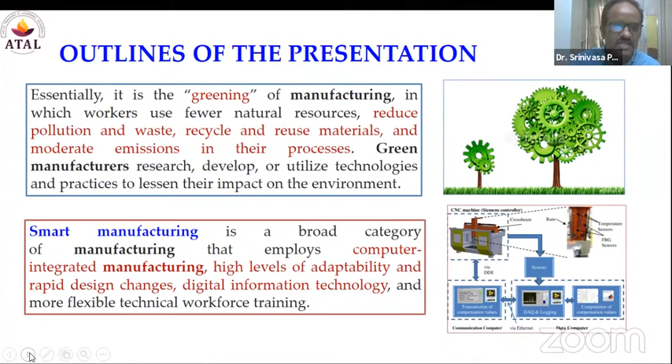So my presentation is going to consist of the details of the work.

As part of my title, it is all about developing a controller which works in an adaptive way according to the situation. For this particular problem, I need to define the problem based on my literature survey. I'm not going to present the literature due to shortage of time.

Based on the literature, I have identified some gaps. Those gaps will be the targets of my presentation, represented as objectives. To achieve these objectives, I need to select an experimental setup.

Then I need to design an experiment for how to utilize the setup in an optimum way - what are the minimum number of trials so that the required output can be achieved. For that purpose, I need to go for design of experiments.

Then I need to give details about the major equipment which is procured under the funding of Government of India. I have used this equipment as part of my DST project, a DST funded project.

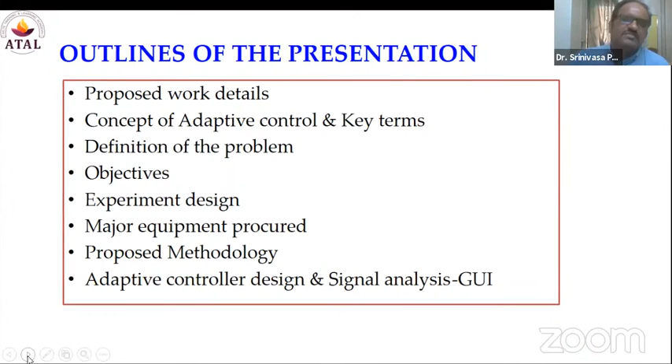First of all, tool material, cutting parameters like cutting speed, which will be expressed in meters per minute. If you want to express in terms of RPM, definitely you can do, but you need to consider the diameter of the cutter and the feed rate, depth of cut, workpiece material, cutting operation type, coolant, tool holders, machine stability.

Every machine inherently, by default, the OEM manufacturer is going to specify about its limits. Whenever you are pushing that particular stability limit, the machine will start giving unwanted expressions. It is started giving its responses.

Now you need to capture the responses and understand them. Even though you are able to visualize or hear the particular responses, this visibility or audibility does not give you any quantified information. To get it quantified, you need to take the help from the sensors.

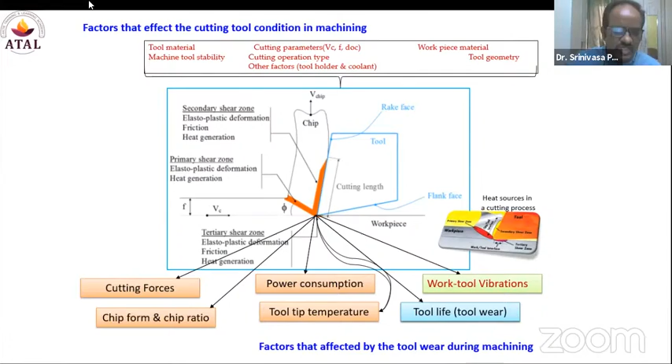And if you talk about any academic institution, the maximum rotational speed we allow our students to inspect or carry out their experiments is generally up to 2000 RPM. In rare cases we allow undergraduate or PG students to go up to 3000 RPM or less than 4000 RPM. So as part of this presentation, I am going to give a scope on working beyond 10,000 RPM. The machine we have procured as part of the DST funding is capable of working up to 18,000 RPM.

Now, so my concept is an adaptive controller design that is going to work based on the amount of vibrations present during the machining operation. So whatever logic I'm going to suggest, whatever decision I'm going to take out of this work, is based on the vibration signals only. That is why I'm spending a minute or two giving brief details about vibrations. I'm not going into complete detail, it is almost impossible to convey. Even I have not gone beyond a certain level of this particular concept.

It is an ocean. If we talk about vibration, it is present everywhere. And I'm trying to use the concept of vibration, and I have incorporated this information into decision making. Now, vibration is a movement of a body about its reference position due to an excitation force that causes the motion. That is what we have discussed.

When there is no interaction, there will not be any vibration. When there is an interaction, automatically it will start to vibrate and deviate from its required position. That is called the deflection.

So about the first signal, this is about the basics of vibration and particularly machining vibrations. These two points must be kept in mind if you are planning your research in the field of machining with the help of vibrations.

Coming to the adaptive control. So far, I have presented the basics, the fundamentals, the key points associated with my field of application. You can consider this as a basis for this particular approach, that is adaptive controller design.

Now, as we mentioned earlier, every machining process will have speed, feed, depth of cut as basic input parameters. If you want to consider cutting tool material property as one of the parameters, you can. If you want to consider the hardness of the workpiece material, you can also include that in designing the experiment. Along with speed, feed, depth of cut, workpiece hardness, cutting tool Young's modulus, whatever parameter you wish to include, you can include.

Based on that, you can design the experiment. By involving a minimum of 3 parameters or many parameters as input, irrespective of the amount of input parameters, the output process variables are common: forces in cutting, torque, cutting temperature, horsepower, and spindle deflections or vibration during machining.

Now, these things must be given focus. If they're understood properly, if the information collected in the form of output process variables is used in the right way, there is a lot of scope for safeguarding machinery and improving the productivity of the process. There is a possibility of reducing the cost, and if you are able to reduce the cost of the whole process, it automatically increases the profits to the organization.

So when a variation is occurring, adaptive control is ready with a solution. How it is going to give the solution will be understood later.

Now coming to the definition of the problem. The main objective is to design and develop an adaptive controller design.

We have considered vibrations as a parameter for judging this, because even today, less attention is paid in machining with respect to vibrations. Vibration is a huge area with many applications in industry, but very little focus is paid with respect to vibrations in machining. That is why I have selected vibrations as a decision-making tool as part of this investigation.

I'm not the first person, but I'm one of the few who have considered vibrations as a decision-making tool to do some application with respect to vibration in the field of machining. So that is the main intention.

Now, with the help of vibrations, we would like to show the relation between the vibrations and the surface roughness.

For this process, we need to collect a lot of vibration data. Then we need to quantify the vibration data. Then you need to select which parameter is suitable for your mathematical modeling.

That is why I've specifically mentioned the units: displacement in microns, and the other two are mm per second and mm per second squared, velocity and acceleration. If you know one particular value, one is derivative, the other is integration, and you will get the other two values.

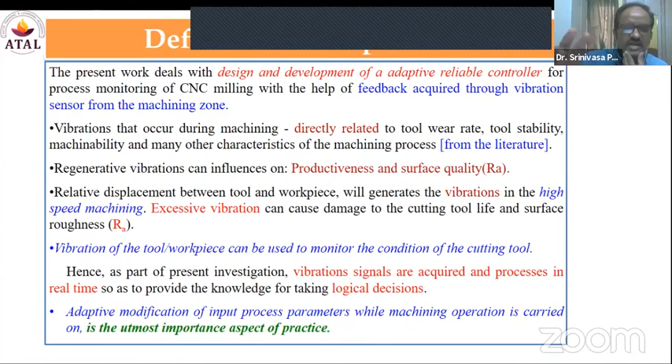Here the main important task is to collect the information about the vibration, then quantify the vibration signal, then develop the relationship between surface roughness and vibrations, then relate these two parameters, roughness values and vibration values, in defining the flank wear. If the flank wear is less than 0.3 mm, you can continue the machining, because it is high-speed machining.

High-speed machining is going to generate highly smooth surfaces. I can give the cutoff value of the cutting tool flank wear up to 0.6 mm. But if I give 0.6 mm, I need to increase the acceptable range for the vibrations also.

As it is high-speed machining and the quality of machining is very important, focused on the surface roughness parameter, I need to give close acceptable limits with respect to surface roughness and vibrations. So I have considered the surface roughness and flank wear as the judging parameters, one with respect to workpiece, one with respect to cutting tool. These two parameters are used to assess the quality of the surface and the quality of the cutting tool, and they must be defined along with the vibration parameters. If that is done effectively, then I can claim this adaptive control is going to act based on the vibration signals, because the vibration signals act as input parameters for defining surface roughness and flank wear.

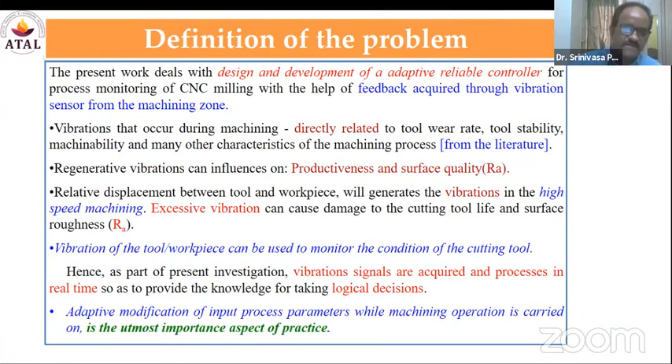Now coming to high-speed machining and design of experiments, the initial cutting speed considered in meters per minute is converted into RPM. We converted it to 7,000 RPM, 12,000 RPM, and 16,000 RPM. Whenever you talk about high-speed machining, if it is beyond 4,000 RPM, you can consider it high-speed machining. For example's sake I'm saying this, but there are some constraints for identifying the cutting speed with respect to workpiece hardness that also define whether it is high-speed machining or not. But for this application, anything beyond 4,000 RPM comes under high-speed machining. So the experiments were conducted at 7,000 RPM, 12,000 RPM, and 16,000 RPM — definitely, whether you consider these conditions or not, it is 100% high-speed machining.

The feed rate is expressed in mm per minute, with different types of depth of cuts and different workpiece materials used. There are variations with respect to the cutting tool diameter and the cutting tool material. We used the most popular technique, the L9 orthogonal array. This particular work and figure is collected from this publication.

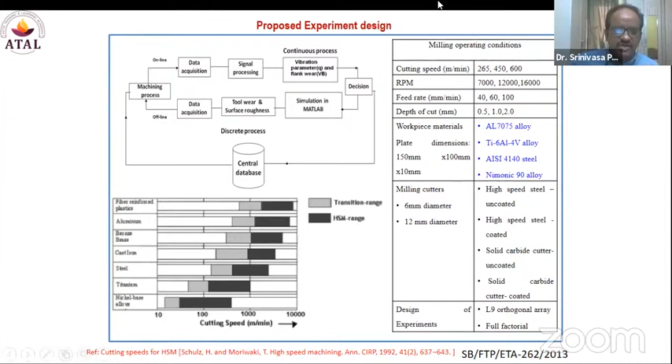As I told, it acts according to the situation because it is an adaptive controller system, it requires some database. Out of the experiment, you identify different situations. Each and every situation must be recorded electronically so that decisions are made based on interacting with the central database. We were able to establish communication between the database, the part programming console, and the sensor by using MATLAB.

First, the objectives of this work: we need to collect the data in real time. The immediate task, once collection is over, is to quantify the signal. We are focusing on the vibration signal, quantify it, then identify the constraints for each and every parameter. Then this experiment must be designed according to the design of experiments, DOE — you can use Minitab software for designing the experiments. Then we identified and quantified the vibration parameter, and tried to relate this quantified vibration parameter with the judging parameter of the cutting tool, that is tool wear.

Now, once decisions are ready and the logic is ready, we try to develop a strategy. This is the ISO 10816 standard, exclusive for machining operations with respect to vibrations. Whenever the horsepower of the machine is of a certain range, for example 10 HP, if any machine runs with 10 HP or less, this standard can be used for comparison or evaluation. They have given 5 different sectors of different ranges of speed and different ranges of horsepower of the machine.

If you type this particular keyword in Google, you will get an idea about how they have classified and suggested standards based on power, horsepower, and rotational speed. We have considered this particular standard for decision making. We collected the data and were able to take some decisions, but that must be approved by an international organization or approved scientific community. ISO is approved by most people and has approval throughout the world. So whatever decisions we made are in accordance with ISO 10816.

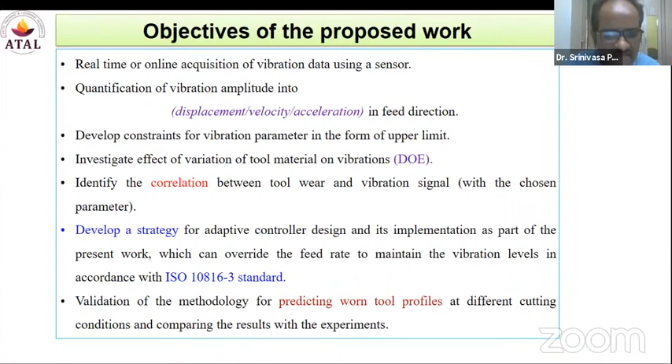This is the equipment I have procured as part of my DST project. This facility is available at GITAM main campus, central research facility, and this is a 3-axis CNC machine. The sensor we used is an accelerometer, Kistler model, a highly sensitive piezoelectric based accelerometer, 8793. It is mounted here at the spindle head, and it is capable of working up to 18,000 RPM.

This is where we are trying to operate the machine. Communication is established between the sensor and the control panel through an RS-232 port. Whoever works in a CNC machine can understand the meaning and need of this particular port. Without the RS-232 port, you cannot transfer information in the form of a part program to the CNC machine. This port is a must for the CNC machine.

A line of instruction, like N01, indicates part of a program. A set of instructions is the program. These programs must be compiled at the controller, and then the instructions are converted into digital form. This information is transferred to the servo motors, which are attached to each and every axis. Each and every servo motor has a lead screw.

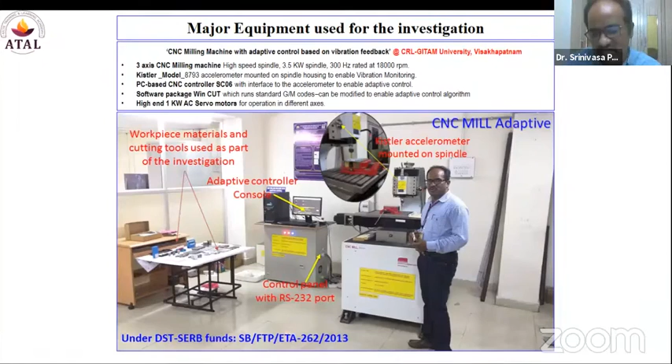We are allowing the machine to run as per our requirement. During the operation, we are focusing on the vibration. We are able to collect the information about the vibration, and then we were able to distinguish the vibration parameter out of the signal.

If you are able to identify this particular acceleration at this particular frequency, and the value of the acceleration is acceptable by ISO 10816, there is no problem. You can continue the program, you can continue the machining. There is no need to change the input parameters.

Whenever this particular conversion of the signal identifies a value which is not acceptable according to the suggestions of ISO 10816, then this system needs some change of input instructions.

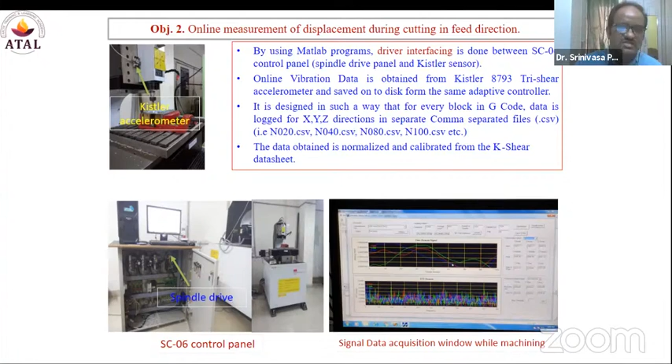Now, this is about algorithm. So, at what time? Rashagir, am I going out of time? It's good, sir, going on. I have no problem, but if participants are interested, I can take 10 to 15 more minutes. Please go on, sir.

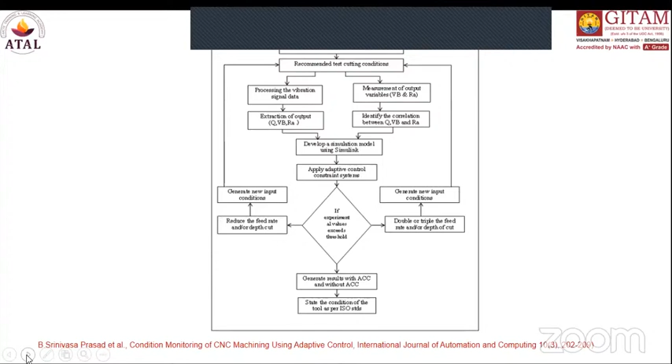Please. So for every methodology, for every concept, you need to develop your own method. Then only, if this particular process or algorithm is implemented by any researcher attempting to repeat your task, it should yield consistent results. That is why you get acceptance by premier journals. This is accepted by the International Journal of Automation and Computing. They validated this algorithm, and we were forced to share our MATLAB program also. Only then did they accept it.

So if anybody is ready to execute the same thing, if you want to repeat any good work from any research paper, we will end up generating a new set of data. That is also considered research. There's no problem with it, because the instrument used by me is different from the instruments available at your end. You are trying to repeat a process or algorithm with your instrument. Based on your instrument's least count or whatever parameters you consider, whether your instruments can be standardized or not, this factor can also influence results. So the set of instruments is different, the situation is different, the machine is different, cutting tools or whatever - there is a definite change in repeating the same task.

If you're able to generate data that is not similar to the data I have generated, and convert your data into a schematic representation that gives understanding or interpretation of your results, and you're able to add your interpretation around the graphs you've generated, you may end up publishing a paper. That is how I've published a few of my publications.

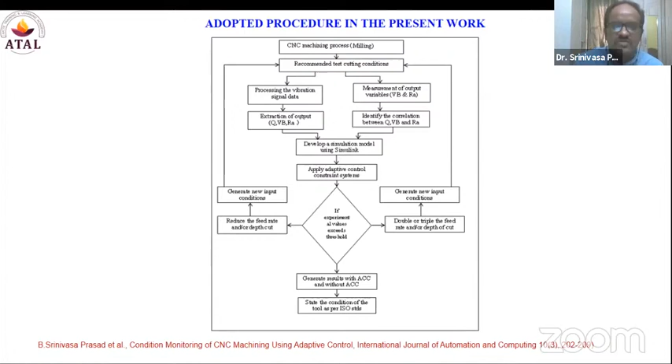Now coming to the real application - as I mentioned, adaptive control is going to act according to the source variables. It has some set of solutions. When a specific situation comes into the picture, it opens that particular solution. If there is an air gap present, you implement program number 1 and execute it. When there is no air gap, you select program number 2. Now I'll give you one more example.

All of you, please observe the middle figure - no air gap. When there is no air gap, you need to continue machining with the required feed rate because you need to remove the material. There is a requirement to remove the material. You should not change the feed rate. If you change the feed rate, it automatically stops removing material from the start.

Now, when there is an air gap, there is no need to maintain the same feed rate. From this location - for example, if the air gap starts here and ends here - there's no need to move with the predefined feed rate. You can move from the starting location to the ending location of the air gap a bit faster than the required, pre-programmed rate. There's no need to maintain the same feed rate.

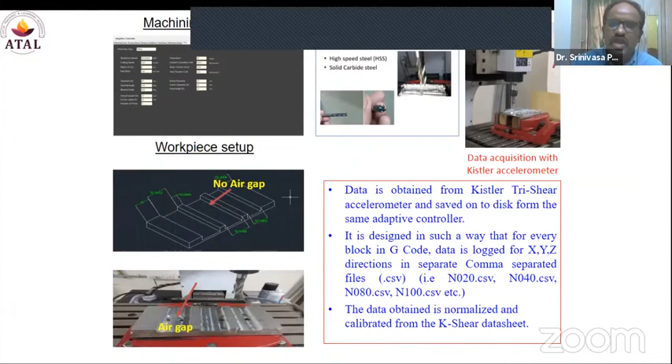If the vibration levels indicate no air gap condition, there is another set of solutions. If vibration signals are present, you can continue machining because the vibration levels identified are well within the limits of the ISO 10816 standard. As long as the vibration signals are within the guidelines of the ISO standard, there is no problem. You can continue the same input parameters for executing the machining tasks, cut 1, 2, 3, or 4, whatever it may be.

So based on excessive or lesser values, there are 2 different solutions. With the presence of the air gap versus without presence of the air gap, another solution. Amount of forces, another solution. Amount of surface roughness, another solution. So like that, you can increase the complexity of the whole system.

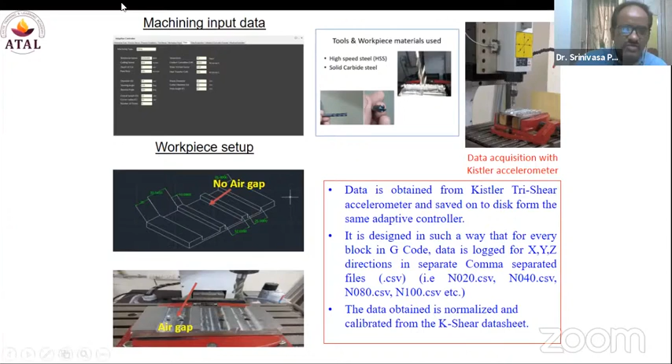How exactly it is going to work will be shown in the next slide. This is about machining type and process setup. Everything can be given as an input, and this is where the vibration signal comes into play.

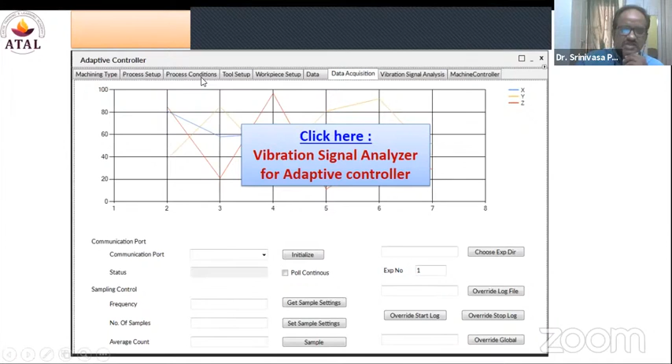So I'm taking the time, don't worry. Now, this is about the initial time signal. You can identify the presence of vibration in the system, and you can quantify how much it is, giving a quantified signal.

Now, I'm going to show this with a MATLAB application.

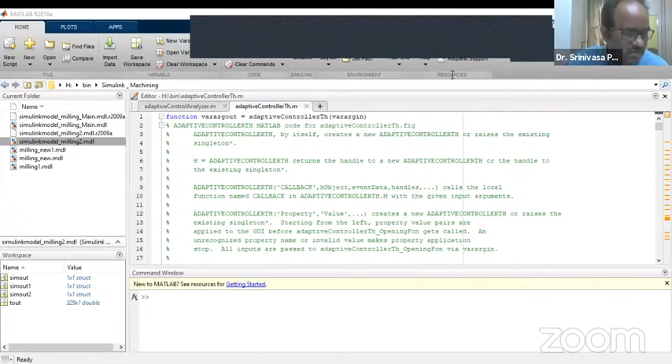So all of you, can you see my screen? Yes sir, yes sir, it is visible sir. Okay.

So it takes some time to process. Kindly cooperate with me because it is part of a DST project. If I'm able to generate some idea in any of the participants, it will be useful for me, it gives a lot of happiness to me. That is why I'm taking extra time. I'm not hiding anything, I'm giving all the details. It is an open document, supported by the government of India, and it is my duty to give it back to the interested people.

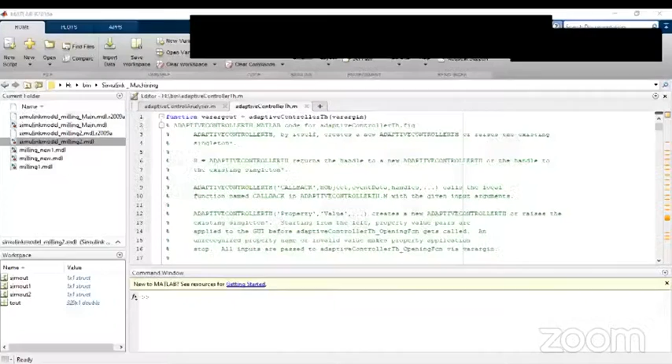So I think it is taking time. Sir, can you help me how to do this? I'm trying to show the MATLAB application. It is not visible, sir. You can share the screen, sir. That is what... yeah, it is visible sir now.

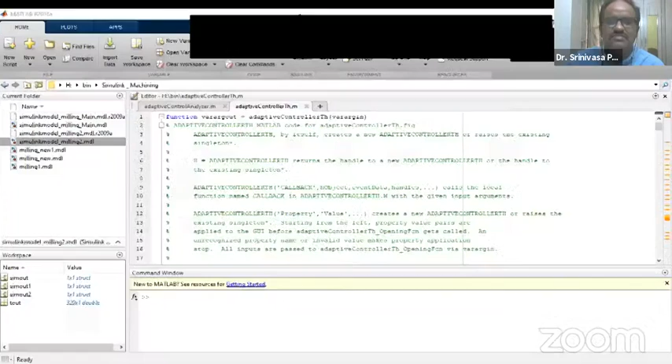Sir, but some black patches are coming, sir. Okay, 1 second, I'm closing down and I'll close it and reopen it again. Okay sir. This is the last attempt, if it doesn't work I'm going to go ahead. Sir, still some problem is coming, sir. Okay, I'll continue with the presentation. Okay.

No problem, there is... I have selected two options. I'll show the exact application out of it.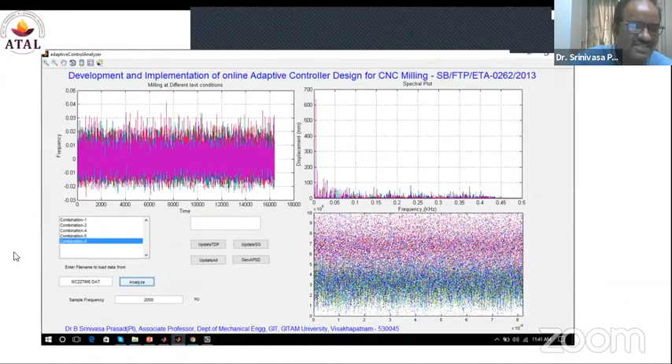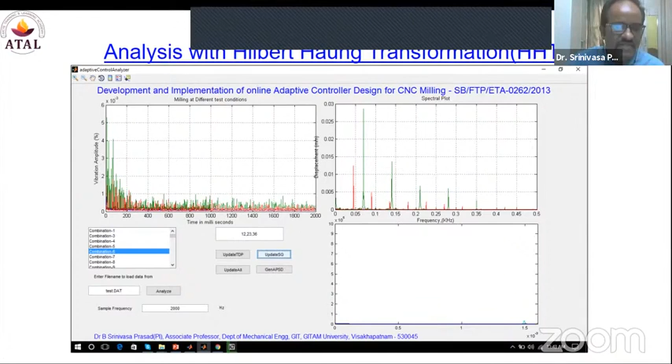This particular window is going to give the amount and quantity of the experimentation we have conducted. Identifying the vibration parameter is one thing, and identifying when to implement the adaptive control logic is another thing.

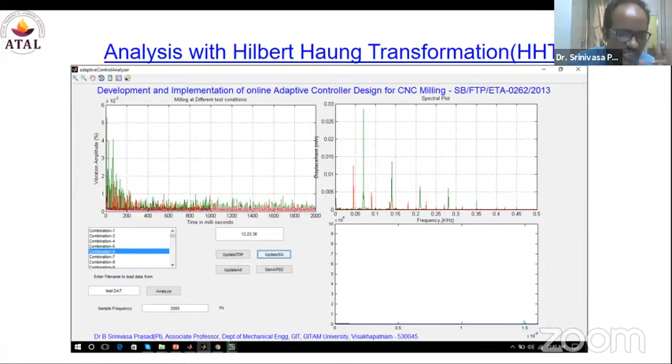Vibration signal quantification is done with the help of fast Fourier transformation, and deciding about implementation of the adaptive control logic is done with the help of Hilbert-Huang transformation. So two different signal transformation functions are used: one is FFT, the other is HHT. These are popular applications, and HHT is nowadays most popularly used extensively for machining applications. One is for quantifying the signal, one is for logic implementation.

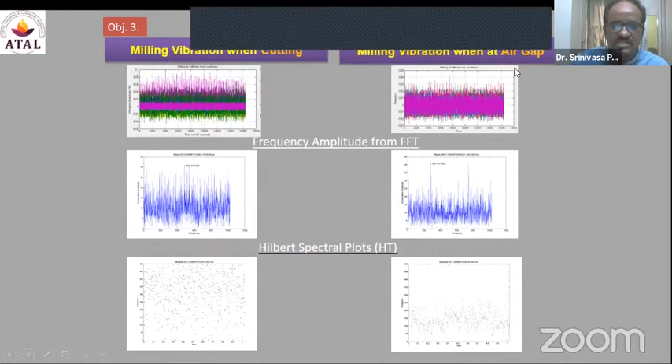So when cutting without milling, vibration during the cutting, milling vibration when there is no material removal.

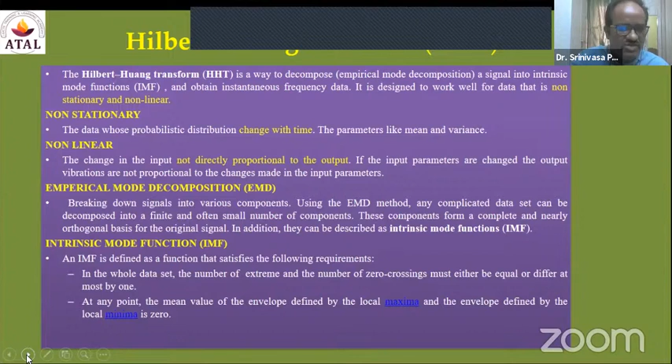Hilbert-Huang transformation is used for nonlinear applications. Most machining applications, especially high-speed machining, generally involve nonlinear data. So this is where the Hilbert transformation is very much useful.

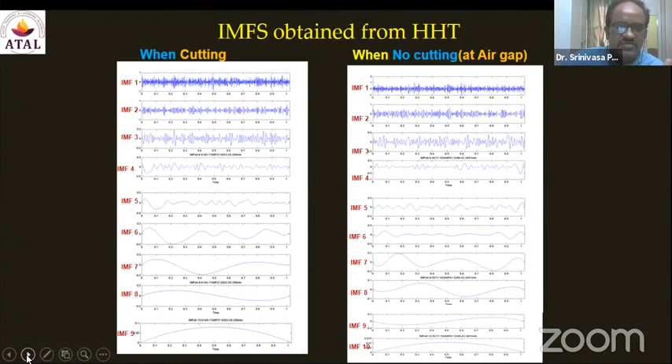I'll show you now. You need to identify which signal. First, initially, out of your collected signal, you need to decompose into more than 10 responses. In most cases, up to 5 responses, there will not be any change. Beyond 5, the system starts showing differences. These deviations must be related to the decision-making for implementation of the adaptive control system.

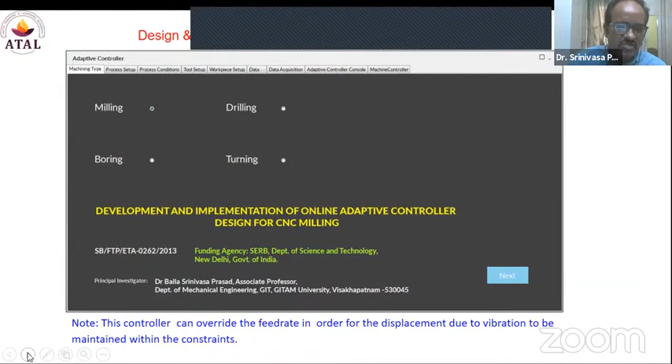Due to shortage of time, I could not focus on this because I need to show some live examples. I'm quickly going to the next step.

This particular system we have developed is capable of taking an AutoCAD drawing as an input parameter, and it automatically generates a part program. Based on the 2D drawing, it generates the part program. That is how we have developed it. Once you're comfortable with some programming, anything can be done.

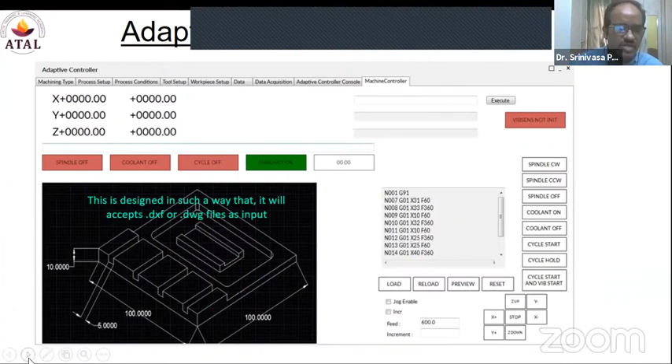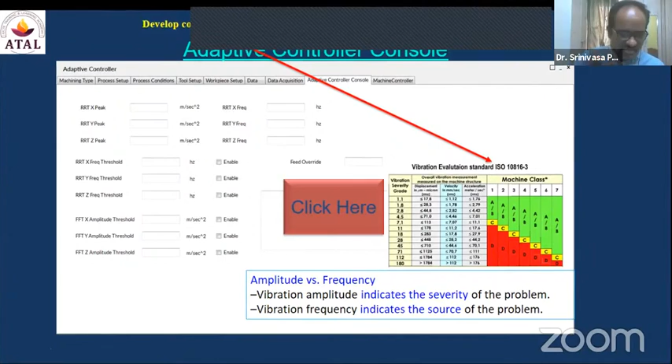I was mentioning the standard ISO 10816, which gives the suggested guidelines for different categories of machines. You can consider A, B, C, D. My machine fits the category guidelines of A, working under 20,000 RPM, with some horsepower constraint. Based on that, I selected the guidelines associated with category A.

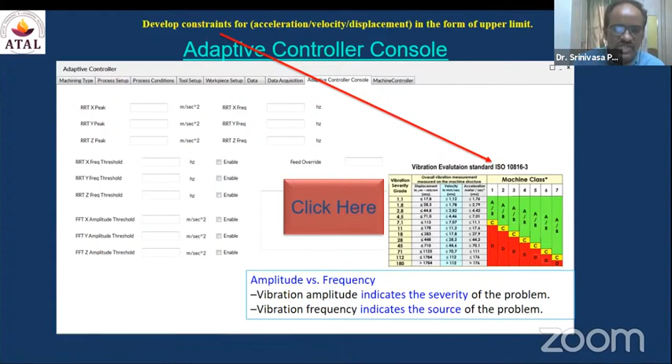Now, if I'm able to project the MATLAB application with the help of this Zoom application, you could have a clear idea about how exactly this MATLAB Simulink is supposed to work. Now you can observe with ACC, with adaptive control, and this is without adaptive control.

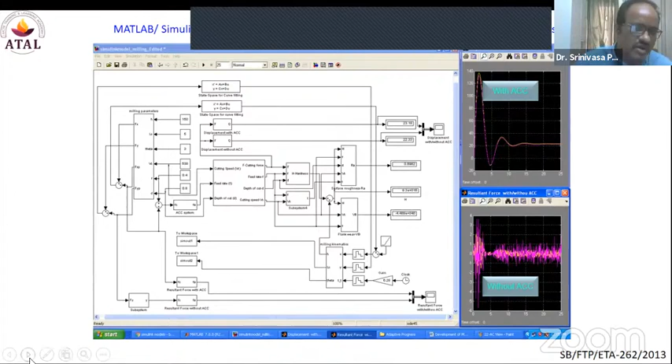This process will take place in less than 20 seconds on the controlling system we have used to operate the CNC machine. That is how we developed the program. Everything, most of the programs, are prepared with MATLAB and 20% from AutoCAD, using AutoLISP, not the 2D drawings, AutoLISP.

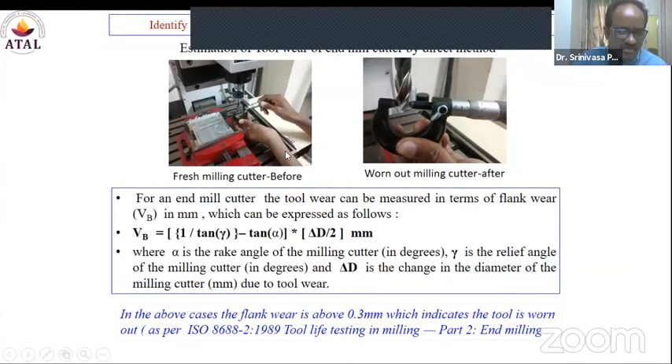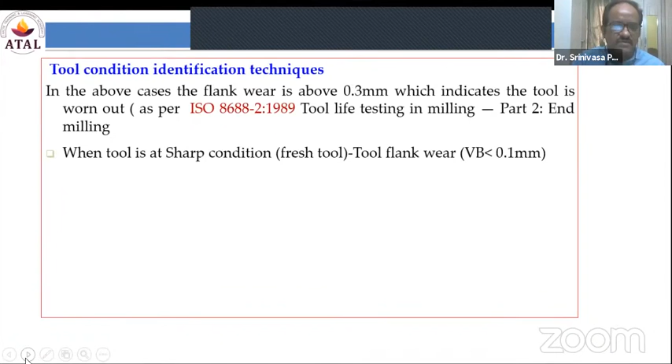This is about measuring the judging parameter, that is tool wear. Now, these are the constraints I have considered. If you remember the vibration severity charts, I have considered this particular standard.

As long as the displacement values, I considered the displacement parameter depending on my mathematical modeling. There is no restriction to only follow displacement. Based on the LHS units matching, I used this particular parameter. As long as the displacement values are less than 20 microns, there is no problem, and you can continue the same input instructions.

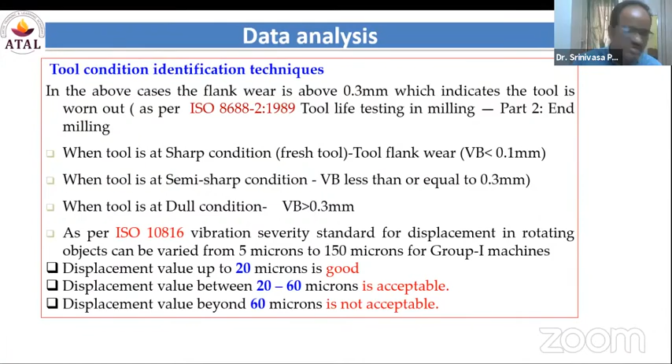The displacement was found to vary between 20 to 60 microns. When the displacement value is beyond 60 microns, machining is not allowed to continue. That is identified with the flank wear values also. As long as flank wear is less than 0.1 mm, that correlates with the 20 micron situation. As long as flank wear is within 0.1 to 0.3, the situation is similar to that vibration level. Whenever the vibration displacement value is found beyond 60 microns, automatically the flank wear is found beyond 0.3 mm.

That is why I considered ISO 10816 and ISO 8688 for judging tool wear with respect to the multi-point cutting tool; for a single point cutting tool, ISO 3685 applies. These values are considered as cutoff values with respect to rejection of the cutting tool, and also as cutoff values with respect to the vibration signal. When there is a deviation outside this group, you need to take a decision.

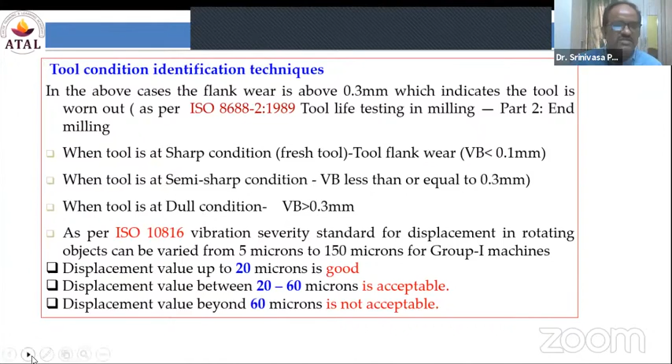So we were able to establish the logic with the help of FFT and HHT, and I'm going to show the execution of this particular thing.

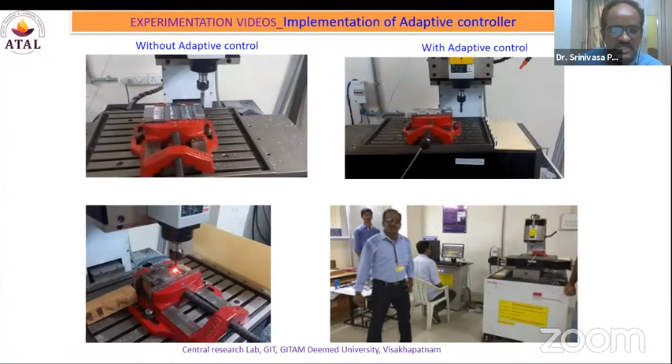Now, the logic is developed only for one situation I have presented, due to shortage of time. But we were able to execute as per our plan, as per the targets. It is successful, and it is still running in the Central Research Laboratory at GITAM.

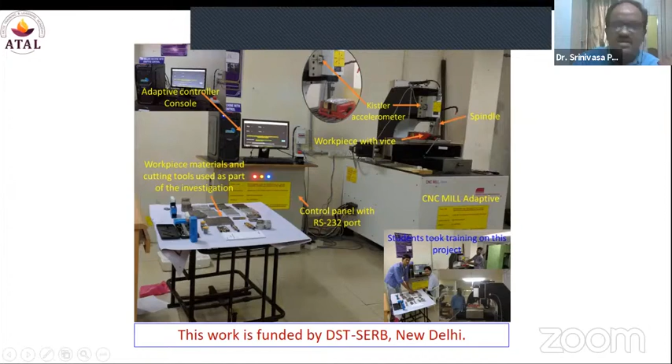Most of my students work in this particular lab. This is the equipment I have purchased, and these are my team. They have worked under my guidance. As a faculty, I always try to encourage my students. It's my passion also.

So I'm able to justify the logic with the help of vibration signals. I have used the vibration signals as feedback. I'm able to regulate the input parameters without switching off the machine during machining, and as far as possible I have included nearly 5 to 6 different situations which come under sources of variables. I'm able to justify the logic with adaptive control and without adaptive control, and I have successfully completed this project. This is supported by the SERB, Department of Science and Technology.